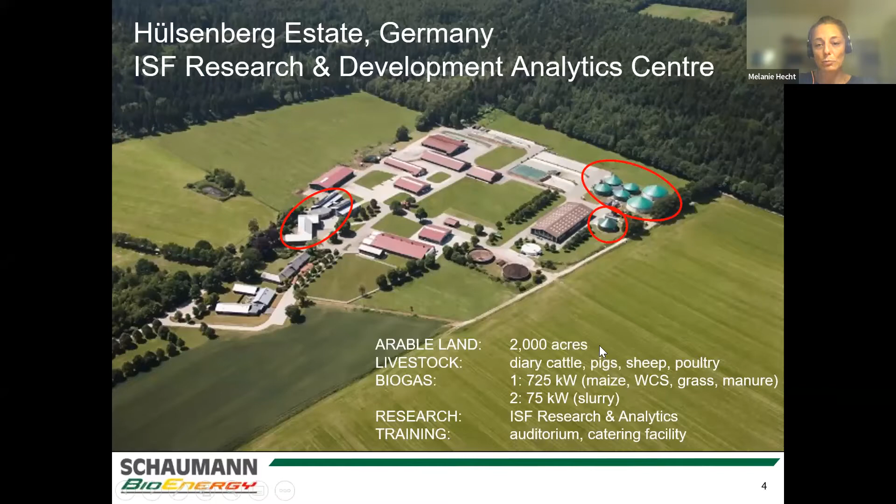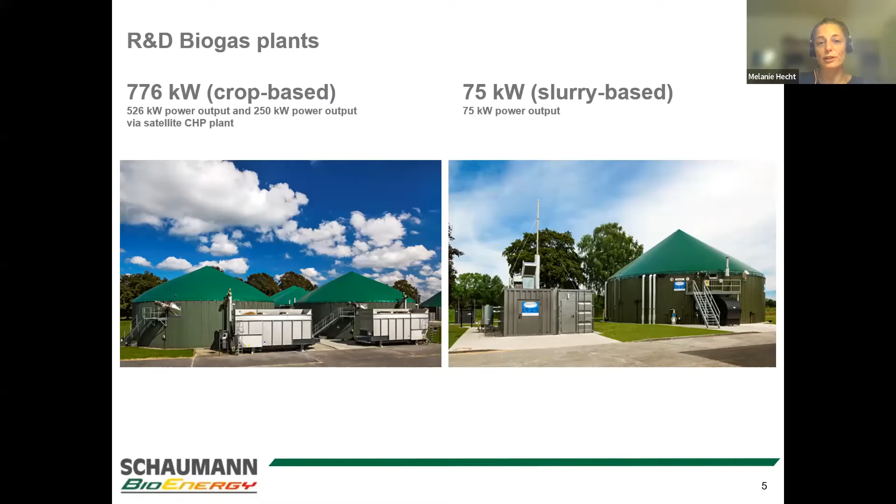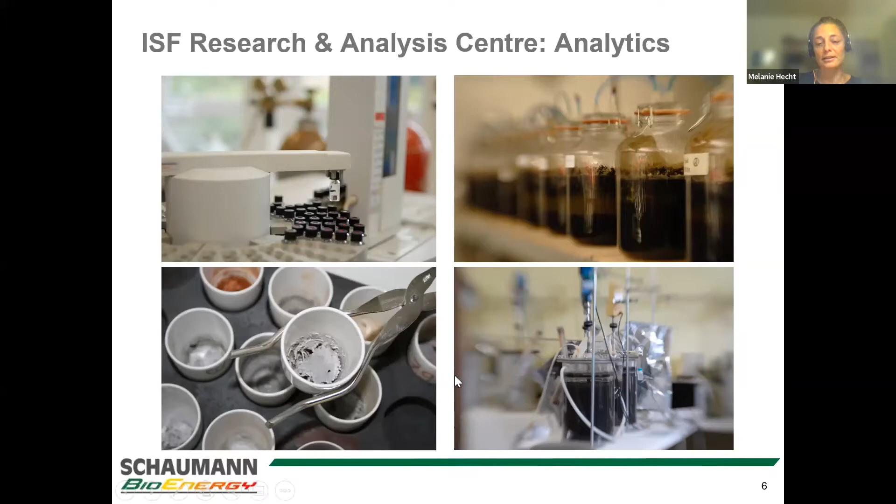We run a research estate in the north of Germany, where we also have 2 biogas sites, a larger one and a smaller one, that we use for research purposes. One is crop-based, one is slurry-based, and we test our own products in those biogas installations. We have a research laboratory. We do our own in-house research and product development, and also offer any biogas analytics that is necessary on a biogas installation, that ranges from volatile fatty acids to trace elements to biogas yields to any analysis that you need on a biogas site. Our approach is hands-on. That means we go on site. We consult worldwide, but that doesn't mean we're only on the phone or only via email, but we go on site.

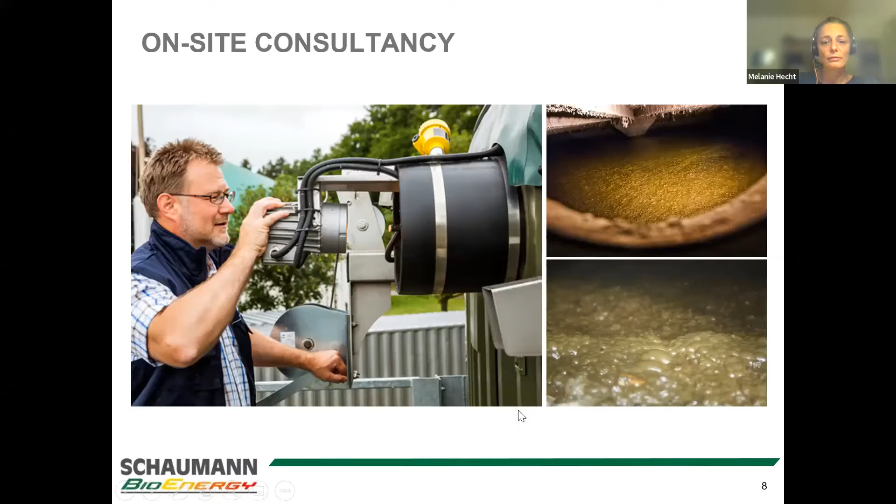We have partners and subsidiaries in countries, but we also go there ourselves. So as I said, I myself have been to Mexico. I have been to biogas plants with our partner, Victor. And that looks like that. We look into the digester if possible. We judge the surface. We look at, is there foam? What's the stirring like? What do the gas bubbles look like? What's the desulfurization, the sulfur deposits, and so on and so forth.

We look at feedstocks. We take samples. We discuss analysis with the operators, explain and interpret, troubleshoot and optimize. We look at feedstock compositions, what makes sense, what does not work together, what is a good feedstock, what's the gas yield going to be like. We are also forage conservation specialists, that is, we are ensiling specialists for grass, maize, whole crop, for any silages, and we consult on that as well.

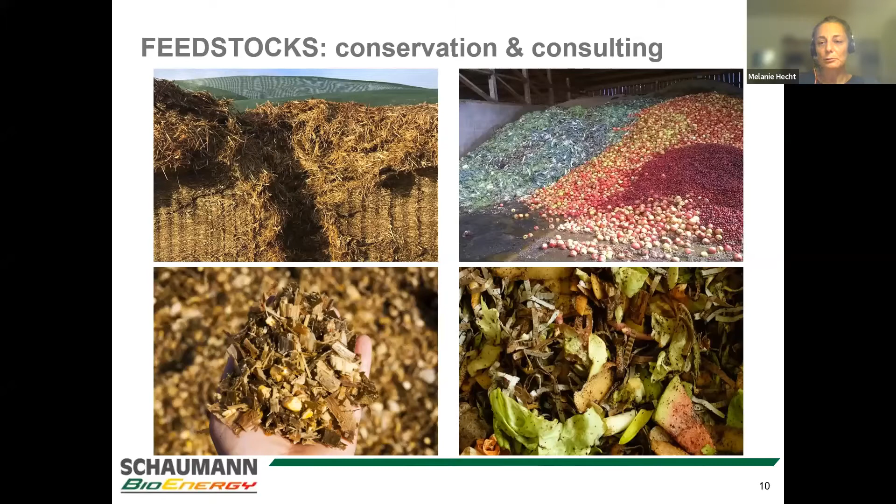In Europe, we offer gas leakage detection. That is, my colleague Carsten goes on site with an infrared camera and tries to detect gas leakages. That is methane. He can detect methane with his camera. I don't know if we offer that service in Mexico. I need to discuss that with my boss first. But it is a very, very valuable tool in our toolbox.

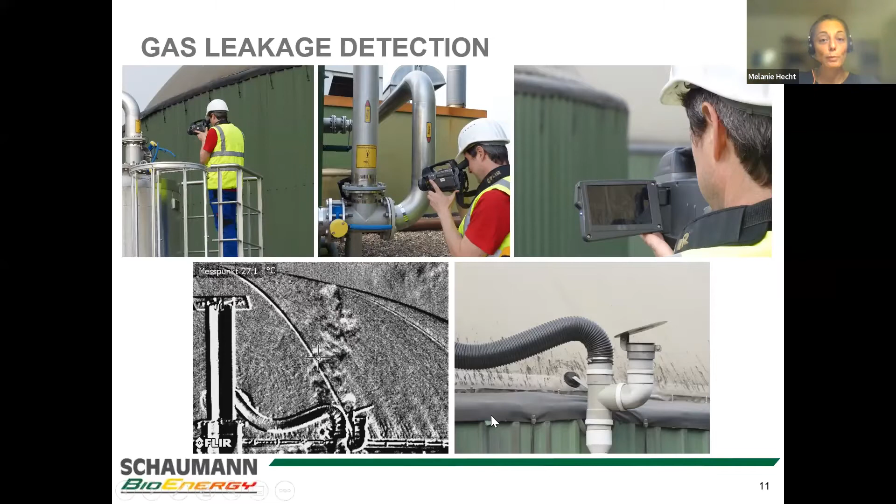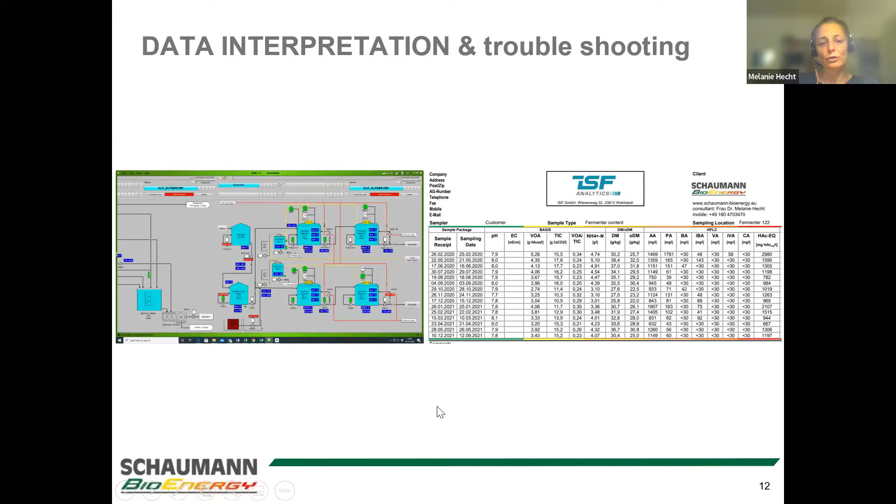We interpret data based on samples, that is analysis, but also site data. We look at the technical bits and bobs of plants, what stirrers, what are the stirring times, what sort of hopper is being used, anything that you can think of, temperature, obviously, feedstocks, everything that comes to mind. And we take all that into consideration and optimize when necessary, troubleshoot when necessary, find the problem and solve it, be it with feedstock changes, temperature changes, with product addition, anything that is necessary.

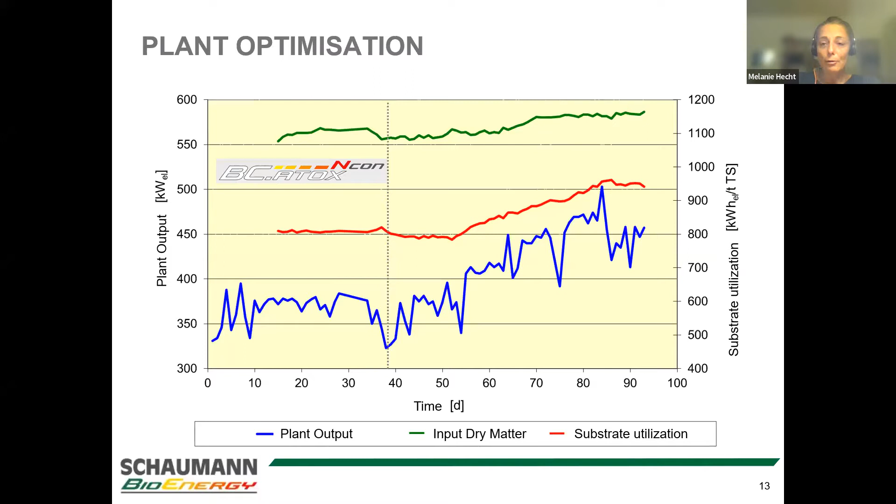Our boots on the ground would be our partner, Victor Basurto. He's got an MSc and PhD in animal nutrition and reproduction. He's got 45 years of experience on his back, 24 years at Cargill Purina alone. And he is a very, very experienced specialist in the field of animal nutrition. And he very quickly understood biogas, and he would be able to come on site, give first advice, maybe dial us in if necessary, take samples, send them to labs, and help with interpretation and troubleshooting.

And apart from being a fantastic host when I was over, and a brilliant animal nutritionist, he is a long distance sea swimmer, which I find really impressive.

Okay, that was us very quickly. So that is what we do in our team of over 60 biogas specialists worldwide. And that is a very, very extensive network I can tap into. There's hardly any feedstock we haven't seen, any problem we haven't encountered. So we are seeing and treating and consulting for over 3,000 biogas sites worldwide.

But that brings me to my agenda. Let me start here. Anaerobic digestion. I'll give a quick technical layout. I didn't know what audience to expect, so I'll show some pictures of biogas sites and explain very quickly how a biogas site works. That might be absolutely bananas for some, but it might be important information for others. I'll dip into the biological process. How does that work? What do the microbes in the digester do?

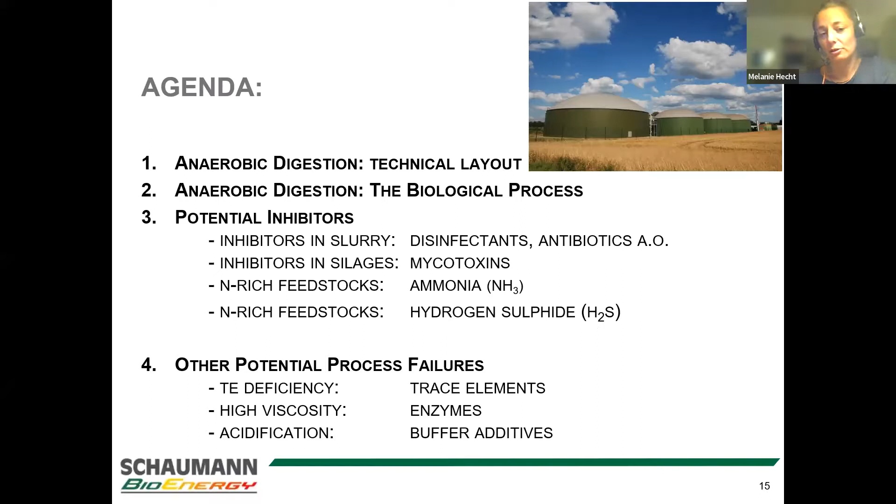But let's get started. So anaerobic digestion, technical bits and bobs. A biogas site basically looks like this, some sort of digester, that is the tank that is being fed, the most biologically active tank. In this case, it's 2 digesters. You can have any number of digesters from 1 upwards, sky's the limit. Then usually comes a post digester. Any residue from the 2 main digesters goes into the post digester and is further digested, and then into the storage tank from which it is extracted for spreading on the field.

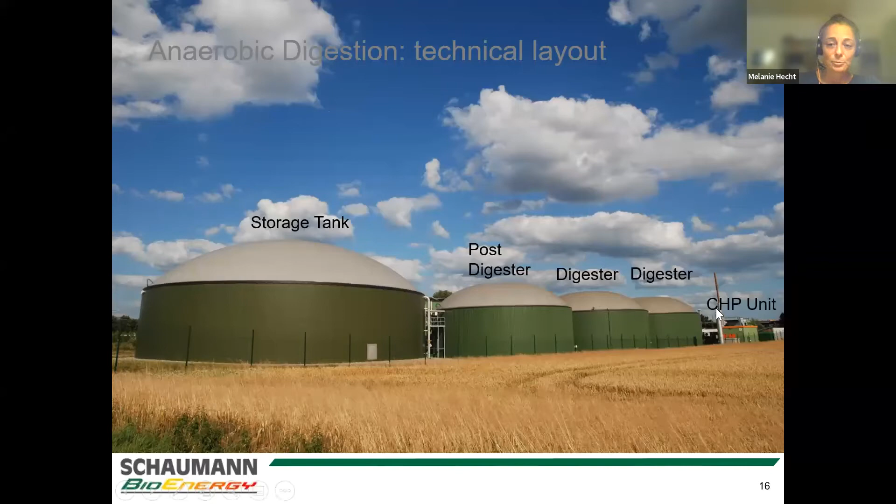The gas, the biogas, consists of plus minus 50-50 carbon dioxide and methane. That depends a bit on the feedstocks, but those are the 2 main components. And the methane is combustible. That is what we're after. We want to extract the energy that is in the methane, and you can either combust it in a CHP unit, that is an engine, or you can upgrade it to biomethane.

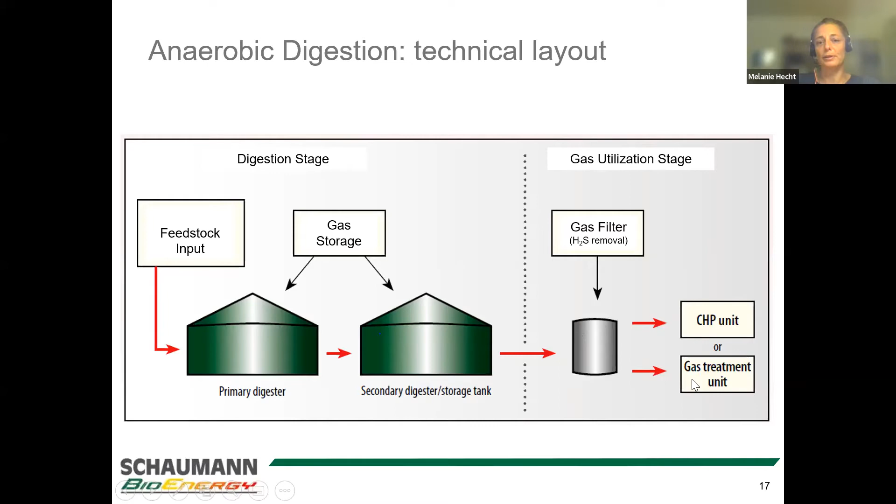You can upgrade it to biomethane and then insert it into the grid. This is a schematic: feedstock input into the primary, secondary digester, gas storage in the membrane roofs, gas filter, that is H2S removal, and then you either run the gas through a CHP unit or a gas treatment unit to produce biomethane. So that's one way of doing it.

A very different way of doing it is a slurry lagoon. It's basically a hole in the ground. You cover it with a foil, trap the gas, and also either combust it or upgrade it to biomethane quality. This is a very different way of doing it. It's no better, no worse. It's very simple, but it can pose all sorts of problems as well.

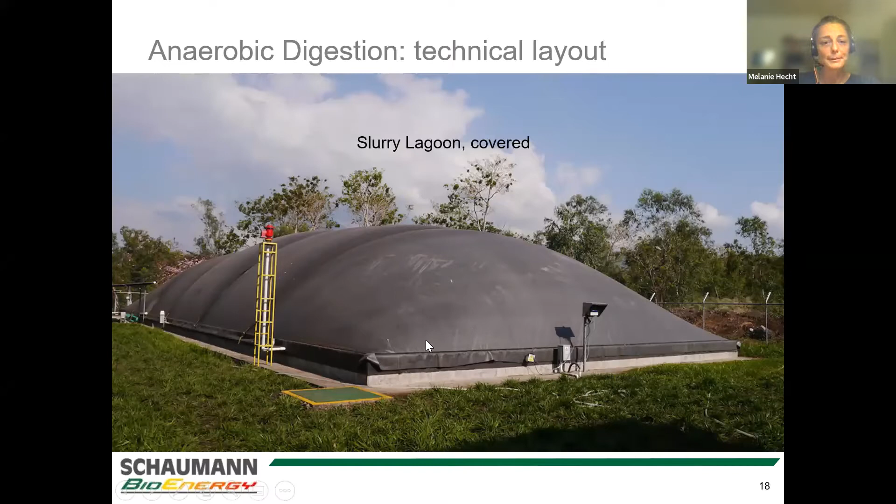Just to give you an idea of what a biogas site looks like. Might be trivial for some, but maybe not for everyone.

Now, the anaerobic digestion process happens in all tanks, but mainly in the digesters. It starts with very large molecules from the input feedstocks, be that silages, slurry, any sort of vegetable waste, food waste, rendering material waste, waste from breweries. Anything organic except wood can be broken down in a biogas plant. Wood cannot be digested in a biogas plant because the breakdown of lignin requires oxygen, and the anaerobic digestion process is oxygen free.

So you start off with those very large molecules like proteins, fats, and carbohydrates. They're broken down in the first stage, called hydrolysis, into their monomers, into their components, that is, amino acids for the proteins, sugars for the carbohydrates, and fatty acids.

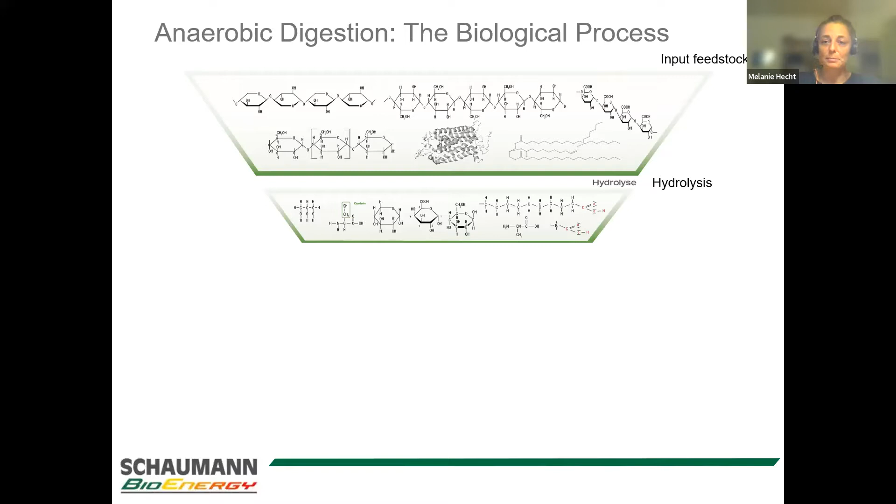It is then further degraded by other bacteria, acidogenic bacteria, during acidogenesis, and all sorts of volatile fatty acids are produced, such as butyric acid and propionic acid, which are then by other bacteria converted in acetogenesis into acetic acid. Acetic acid is a direct precursor of methane. Acetic acid can be converted into methane.

So this is 3 of 4 stages. Hydrolysis is the first step. Acidogenesis is the acid production stage. Acetogenesis is the acetic acid production stage. And then the last step is methanogenesis, when methane is produced and, as a byproduct, carbon dioxide.

I can see Victor now. Hi, Victor. Hey. Sorry for that.

So this is the anaerobic digestion process. It is run by hundreds of different species of bacteria, all in the same space and at the same time in the digester. There is no compartmentalization in a digester. There are biogas plants that run a separate hydrolysis tank, but that is not necessarily the case for all biogas sites. Normally, you have one tank and all those processes run alongside each other at the same time, and they can inhibit each other.

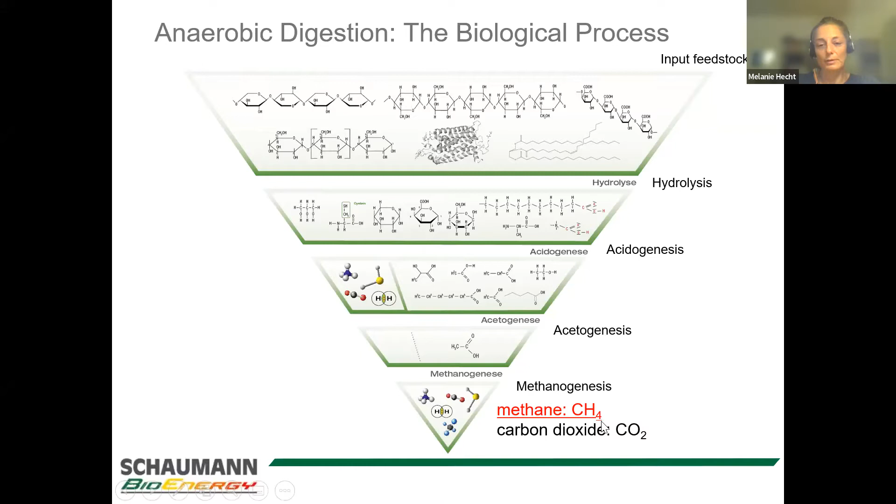If one stage is inhibited, then the following stages cannot run. It's a bit like a traffic jam: when lanes get blocked, cars can't pass. And it's the same here. The different stages metabolize each other's metabolites, and that is why it's very important that all stages run smoothly and that there is no inhibition in between. This is to illustrate that the process takes place in the digester, same place, same time, and all the different stages run at the same time.

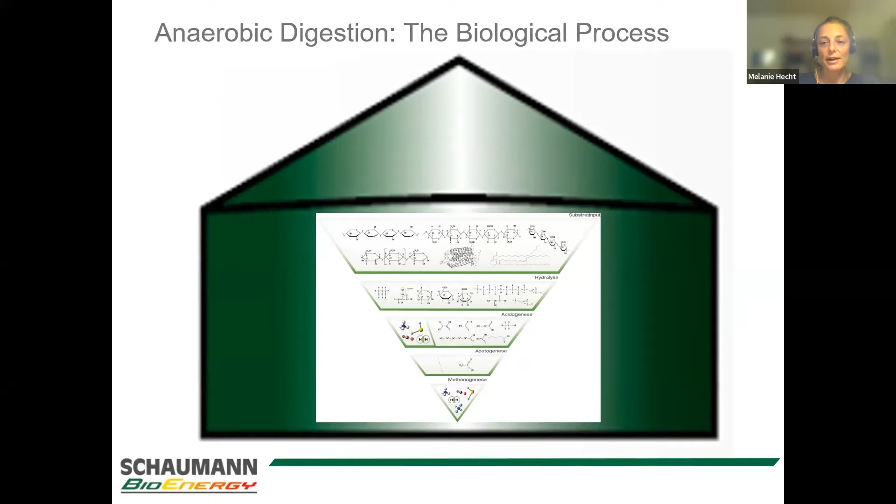Something that you need to take into consideration, especially when you commission a site, when you start a digester, or when there has been process failure, is microbial reproduction times. They vary greatly. Hydrolytic bacteria can be less than an hour, and some acetogenic bacteria take days, and that makes a huge difference.

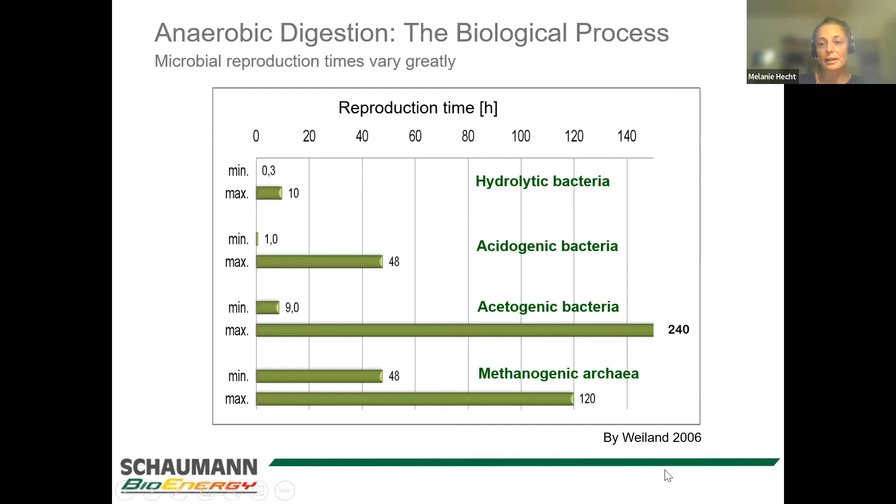When you start a biogas digester, you need to give it time for all the bacteria to establish, for all the species to establish, and for all the 4 stages to establish. This is to illustrate this. So reproduction times of bacteria vary greatly, and that is very important to take into consideration after problems in the digester.

But the idea is you have a large number of species, and it's like a chair with many legs that you sit on. If one leg of the chair breaks, never mind, it's still stable. You're still sitting at a table, you can eat your dinner, even if you lose one leg.

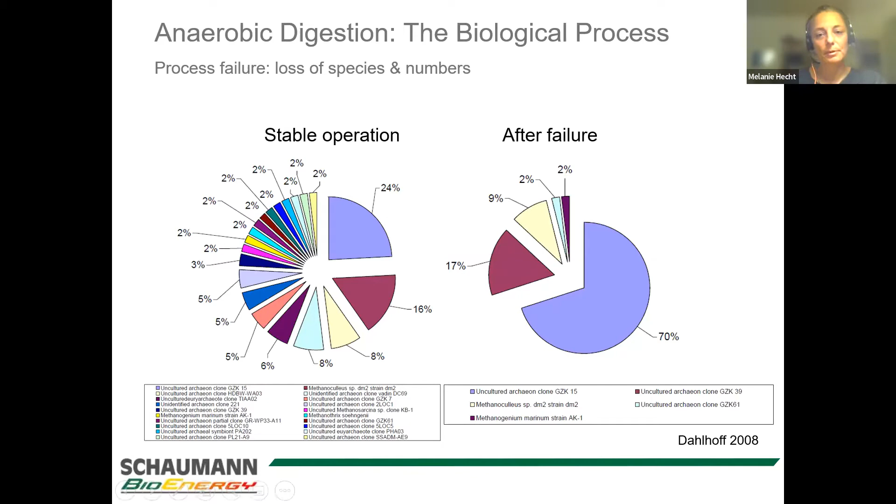Idea, you inoculate. You inoculate again with active material to replenish the lost bacterial species, and you need to give it time. Microbial reproduction times. You need to give it time and trace elements, but we'll come to that in a minute.

A very important environmental parameter for the bacteria is temperature in the digester. Another one is pH. I'm not going to go into detail on that one, but temperature is very important as well. There are 3 distinct temperature ranges we distinguish between: thermophilic, mesophilic, and psychrophilic. You see the temperature ranges below 25, between, let's say, 32, 35 to 45. It's a flexible range, but it gives you an idea what mesophilic means. And thermophilic is the warmest you can run a digester at. 60 is pretty ambitious. I'd actually say no higher than 55. Otherwise, your bacteria will at some point degrade. These are the 3 main temperature ranges.

And in Europe, Canada as well, in the USA, the most abundant temperature range we find is the mesophilic range, because it offers the most stable biocenosis, the most stable mixture of microbial species. It's a very high number of microbial species, and it's very stable. That means it's not so sensitive to changes. If the temperature varies by a degree or 2 or 3 or 5, it doesn't make that much of a difference to mesophilic bacteria. Thermophilic bacteria are very sensitive to temperature changes. The range of species is smaller, and that makes it less stable. It's a very sensitive biocenosis, and that is why a lot of operators opt to go for mesophilic.

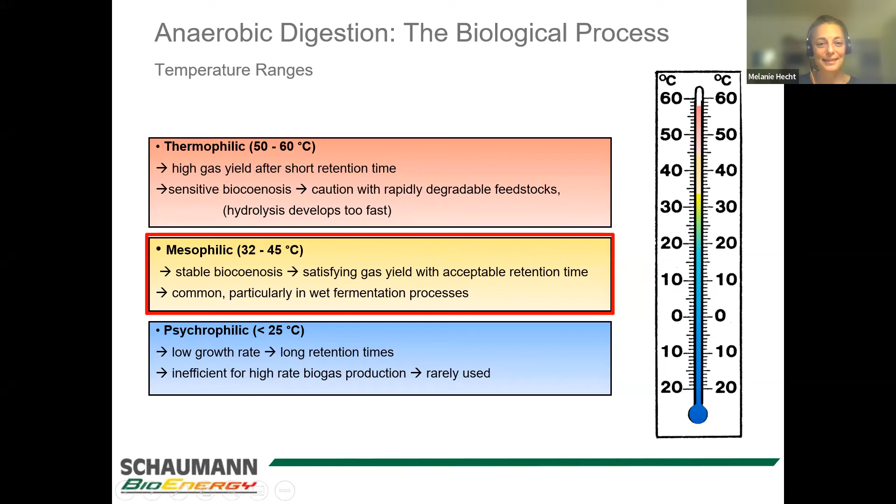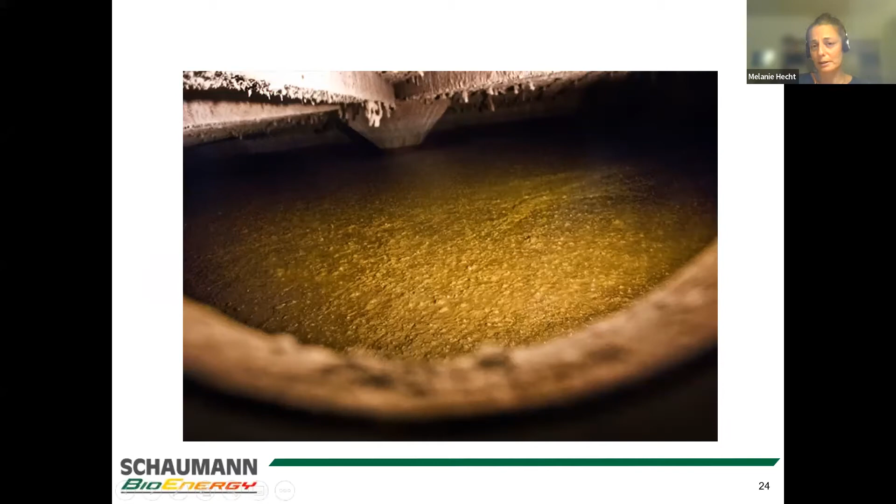Okay, the view into the digester, I mean, it tells you something. You see the gas bubbles, and you see if there's foaming, and you see if there's scum on top, and so on. But what you really want to know is, how's my process? How is it doing? Is it okay? Is it stable? Is there a problem? Can I feed more? Do I need to feed less? Has that new feedstock that I recently introduced had an impact? And that is why we run analysis on samples.

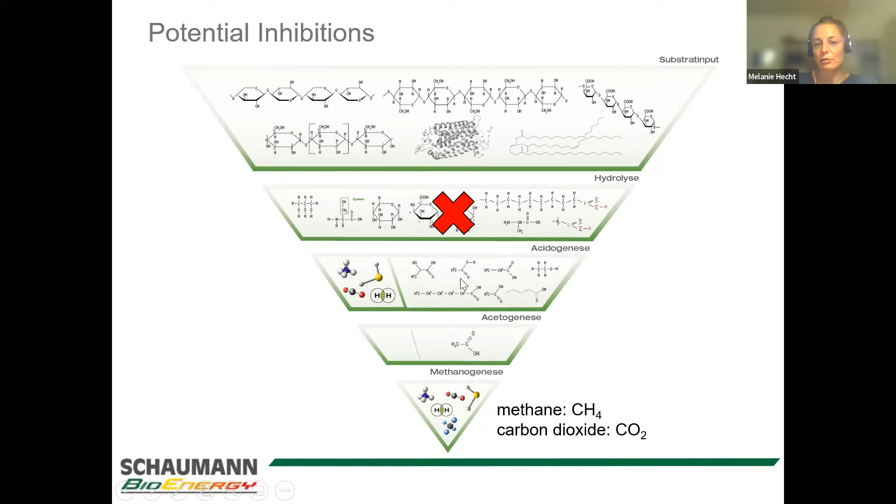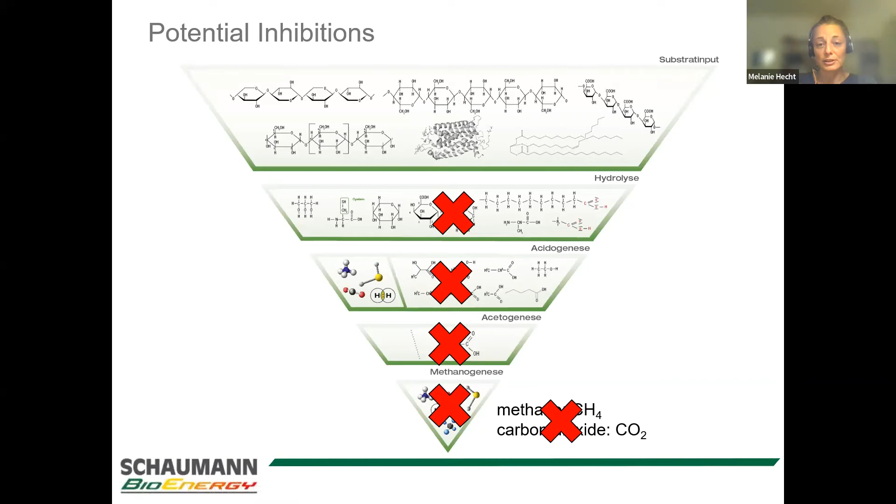Okay, potential problems. As I said, the process can be inhibited. That is what I said earlier. And if only one stage is inhibited, all stages afterwards are inhibited as well, which will then lead to no gas production, which will lead to downtime in your biogas site. The engine won't be running. If one stage is inhibited, then any stage downward of that is inhibited as well. And that's what we're going to look at now.

Are you yourself the farmer? Then you can easily have a handle on this. But if you're buying the slurry or the manure, have an eye out, talk to the farmer. What foot baths are they using? What disinfectants are they using? Formaldehyde has a terrible effect in the digester. It can bring it to a total standstill, and more often than not, it cannot be restarted. So formaldehyde is a very dangerous inhibitor.

Also, antibiotics are very potent in some cases, and they degrade after a while, and you can dilute them, but they cause huge process problems if they are entered into the digester in larger concentrations. And with larger, I mean not very large concentrations. If you have a large livestock number, and you treat them with antibiotics, then this can cause massive problems in the digester.

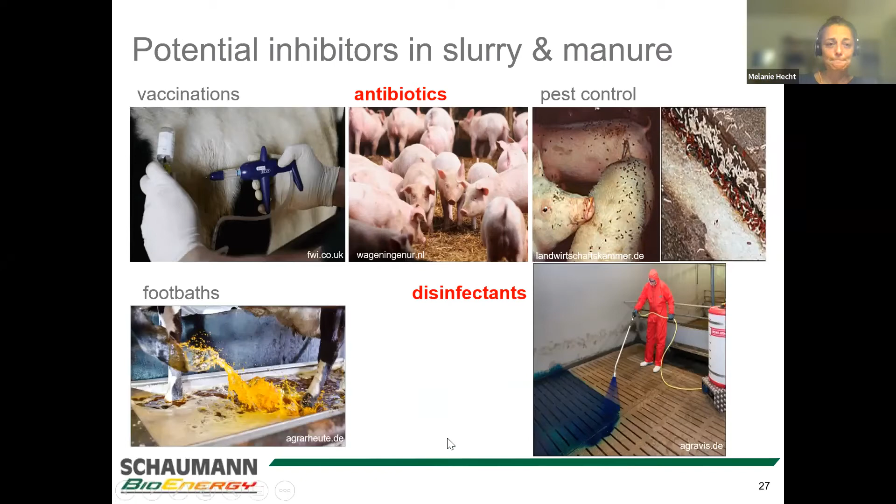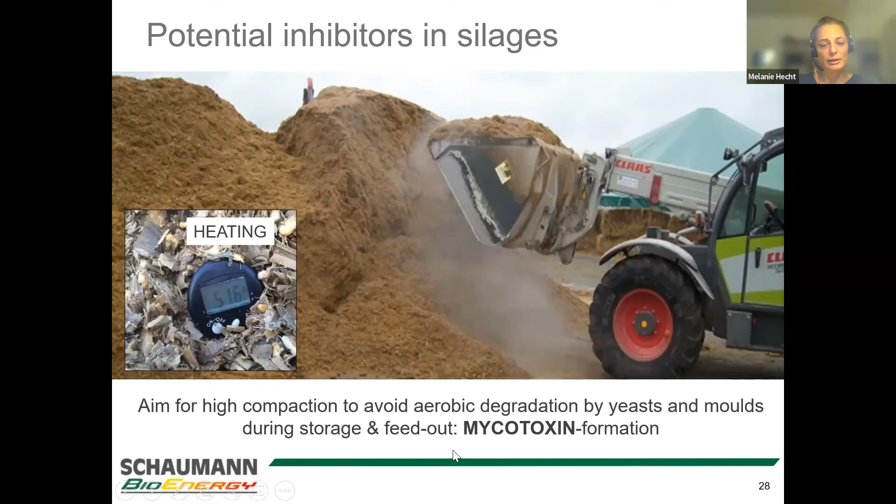Ammonia inhibition is another very widespread inhibition. We have that very often. Risk feedstocks include anything that is protein rich, be it grass, cereals, or nitrogen rich, such as poultry manure and litter, rendering facility material, cheese, stillage, anything that is nitrogen rich.

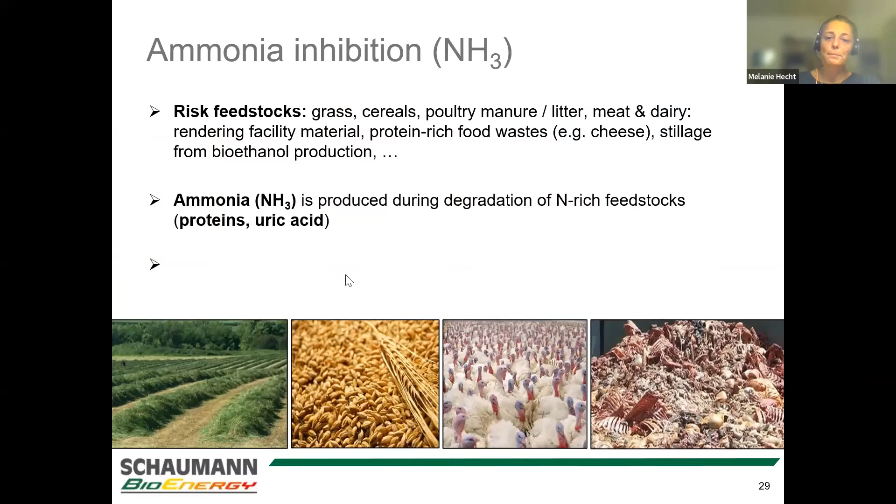And the problem is that ammonium is converted into ammonia with increasing pH and with increasing temperature. Another reason why a lot of sites run at mesophilic temperatures. And this is the problem in many sites. They have high ammonium contents, they have a high pH. This is turned into ammonia, and if they run at too high temperatures, then they run into ammonia inhibition.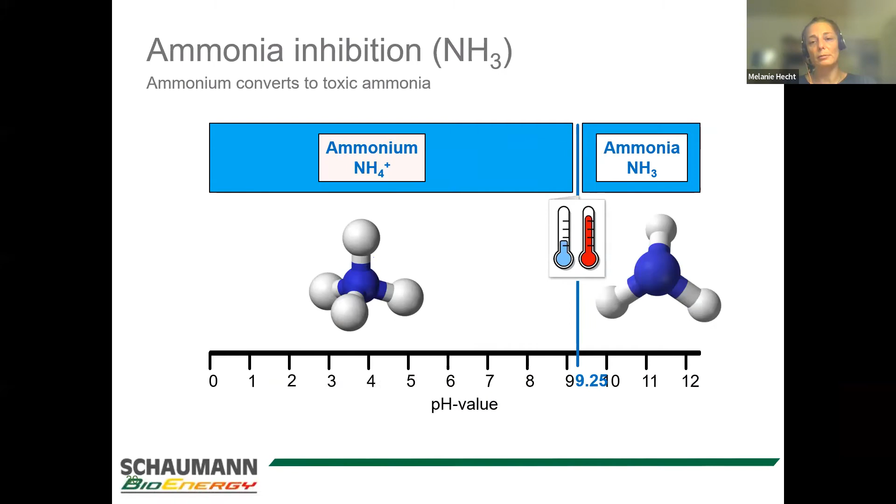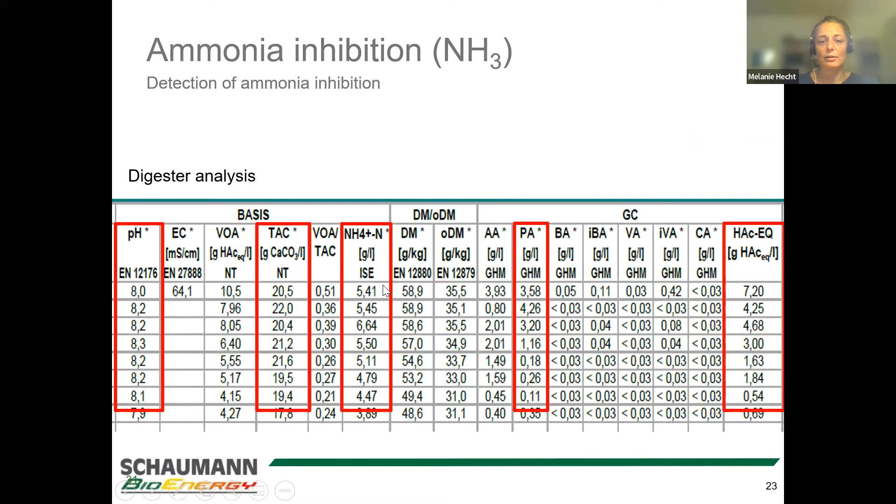Classic example, and you can detect that with high ammonium concentrations and high propionic acid concentrations. Here in grams, 3.6 grams and 4.3 grams is a lot. That is a very high concentration of propionic acid. It's a clear indicator for nitrogen, for ammonia toxicity.

You can get a handle on this by diluting the material, by not feeding the nitrogen-rich feedstock or less of it. But very often that's not possible because you have the feedstock and you want to feed it. Maybe you have paid for it. So that is very often not an option.

You could decrease the temperature, but if you're running at 40 degrees anyway, there's no way to go any further down. Then the process is very slow. And if you're running at a very high efficiency, you need the temperature to process the feedstocks you're feeding.

So then what you're left with as an option is binder. There are ammonium binders available, and they bind ammonium selectively. So you can reduce the ammonia inhibition. You remove ammonium from the equation, ammonia is not generated, and so the ammonia toxicity is remedied.

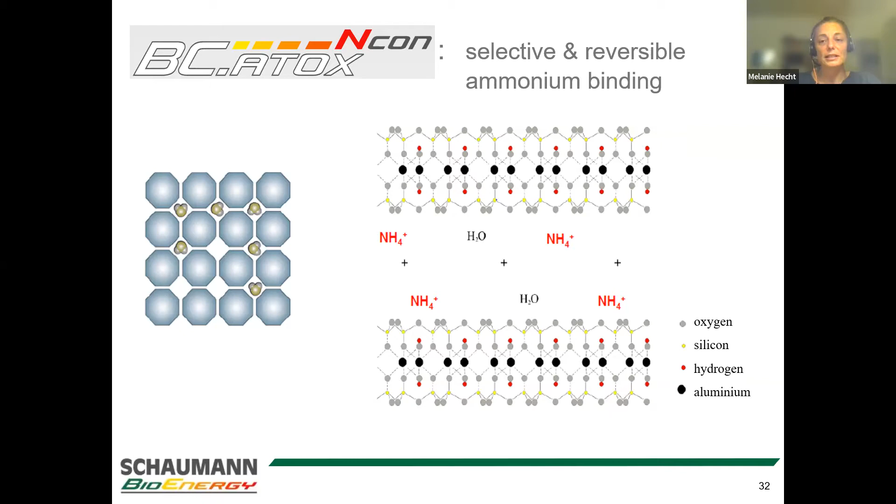Another problem with nitrogen-rich feedstocks is hydrogen sulfide. That is toxic to bacteria and also to humans, by the way. It precipitates trace elements. So that's basically like stealing our vitamins from our diet. You eat fruit and vegetables and you're a good boy and girl and you eat your greens, but if something were to steal your vitamins from your diet, then you could eat as much spinach as you like, it wouldn't do you any good. And this is what hydrogen sulfide does.

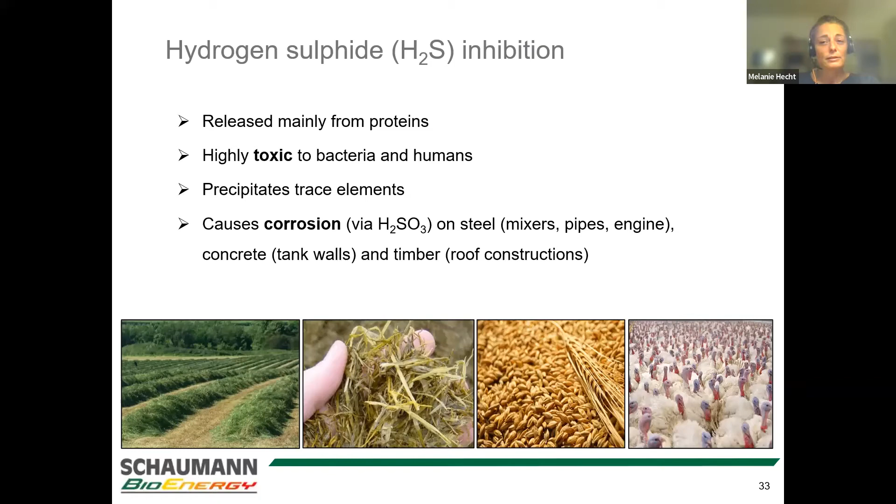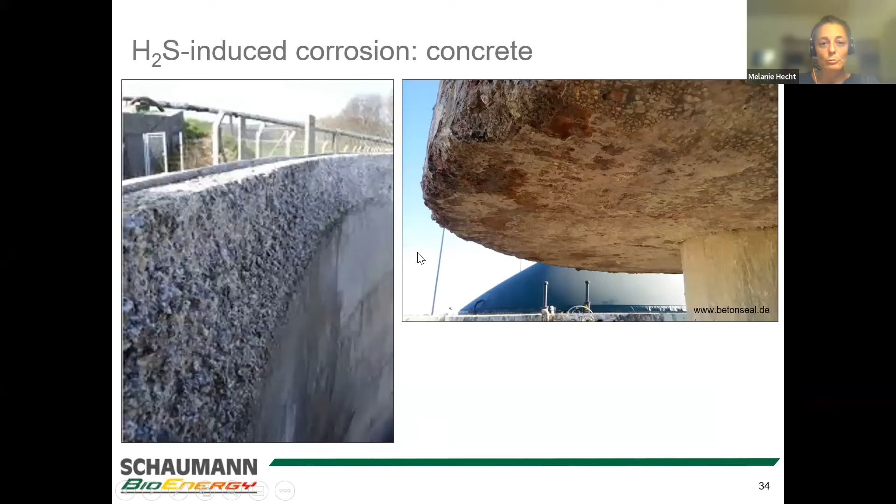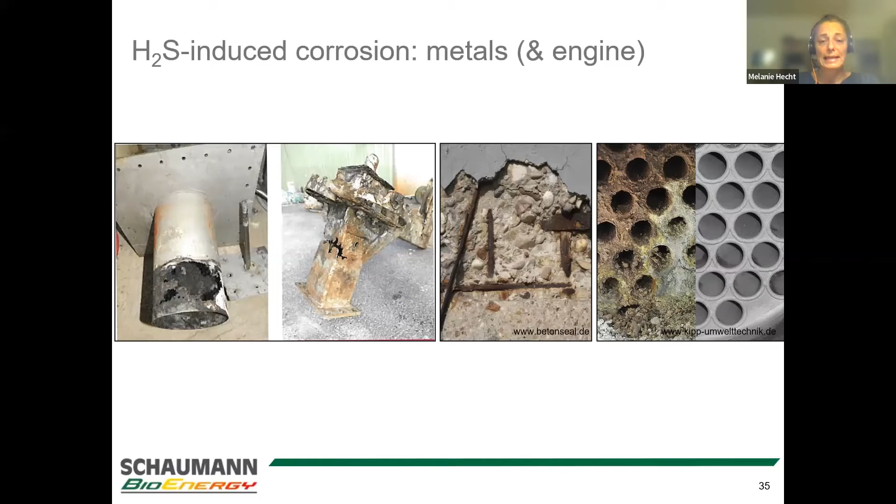It precipitates trace elements. Also, and this is very different and has nothing to do with digester biology, it will corrode anything that comes into its path. It will corrode concrete, it will corrode any metal, and also the engine, and it will also corrode timber constructions. And that is why H2S needs to be removed from the gas and optimally also from the liquid in the digester.

And that is why we recommend a cascading concept of desulfurization for biological reasons and also for technical reasons. You start with iron hydroxide in the digester. So you remove part of the H2S from the liquid itself. You avoid trace element precipitation. You avoid inhibition of the bacteria. As a second step, you can dose air or oxygen into the headspace. This will lead to sulfur bacteria colonizing the headspace surfaces and extracting the H2S from the gas.

And as a third step, you can use an external filter based on activated carbon or iron products to remove the last traces of H2S before the gas enters the CHP or gas treatment units. Gas treatment units require 0 ppm H2S. They cannot tolerate any H2S, whereas CHPs are recommended to be run at 0 ppm, but they can tolerate a bit of it.

The H2S will also acidify the engine oil, so you have shorter operational times for the engine oil, which again causes costs. Engine oil costs money, so the less often you need to change it, the better. So desulfurization is a crucial step in optimizing your site biologically as well as technically.

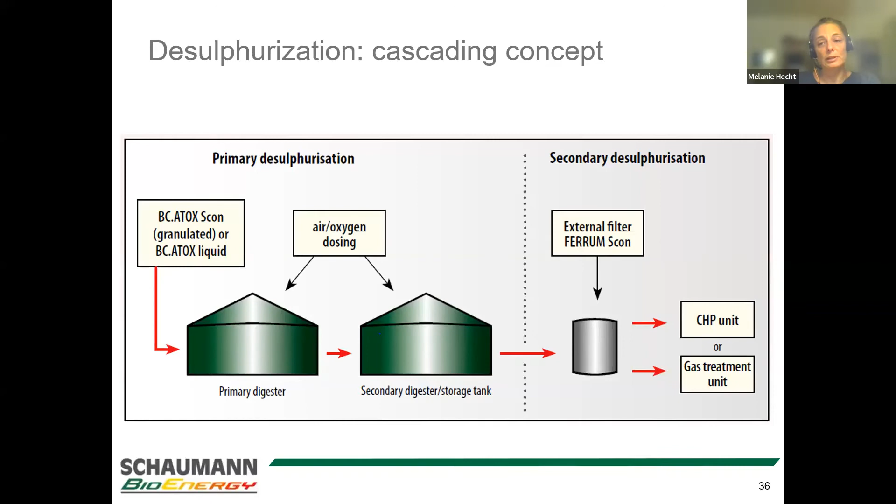Okay, to sum up inhibition countermeasures as such. Best way to get rid of an inhibition would be to identify the toxic substance in the feedstock. More often than not, that is actually pretty tricky, because usually a biogas plant's diet consists of a whole range of feedstocks, up to 10, 15 different ones, changing ones at varying tonnages, at varying qualities. So the identification of a toxic substance is actually difficult.

If you were to think this is my culprit, this is my toxic substance, you could decrease it. You could feed less of it, if that is possible. If it's, for example, an antibiotic contaminated slurry, you need to remove it from the diet as long as it is contaminated. You cannot feed that any longer, as well as formaldehyde contaminated slurry or manure. That is something that you need to remove at once.

What you can then do is you can dilute the digester, the inhibited digester content. You can add water, slurry, watery feedstock like fizzy drinks, for example, beer that has gone off, or milk that cannot go to human consumption. Yeah, so something like that. You can use that for dilution.

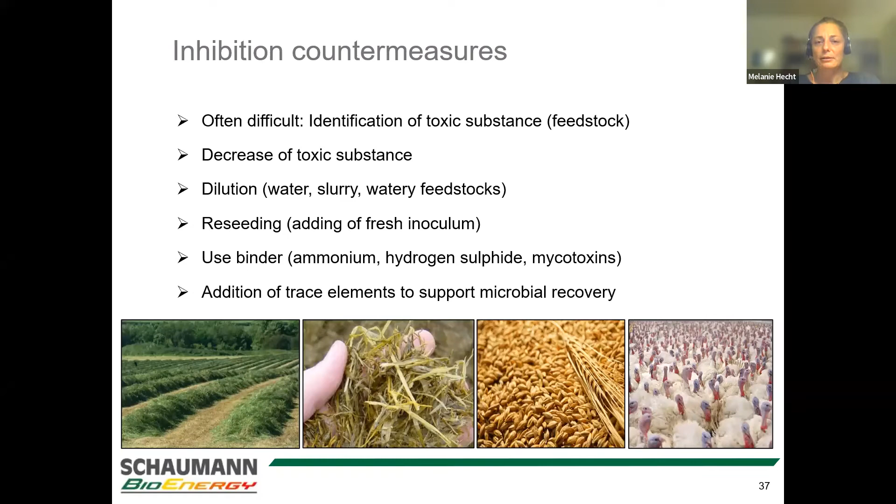And also, we'll come to that in a minute, addition of trace elements to support microbial recovery. You remember the two disc diagrams I showed you. So after an inhibition, you'll have lost species and bacterial numbers, and you need to replenish them by reseeding and by giving the digester time and trace elements, because the bacteria have very particular demands for trace elements. We'll come to that. Yeah, that's the next topic, I think.

This is just to give you an overview of potential process failures. There is a whole range, just like illnesses for humans or for animals. There are a lot of tricky bits in a digester as well. Digesters can acidify due to overfeeding, due to inhibition or temperature changes, or to trace element deficiency. Low gas yields can be caused by leakages, by inhibition, again, inadequate mixing, which brings us later to viscosity problems. Mechanical problems can lead to foaming, to floating layers or sedimentation. So all sorts of issues can happen in a biogas site.

And it is definitely advisable to have a consultant, to have somebody you can turn to who will supply you with the knowledge, with the expertise, and with the products that you need in the case of those failures.

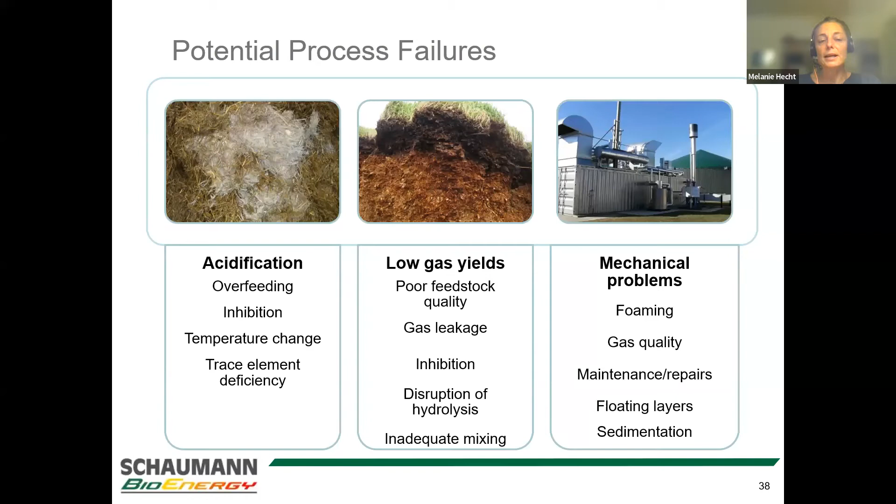There we are. So, which brings us to one of the main problems in biogas sites. Apart from ammonia inhibition, that is a big one, trace element deficiency is another one. Ammonia inhibition is not so easily remedied. It takes a while, takes binder, takes tackling the problem. Trace element deficiency, on the other hand, is an easy one.

All bacteria require trace elements, and if you run your biogas plant at a very high efficiency, like an Olympic sprinter, you know, if you're Usain Bolt, you don't eat spaghetti carbonara for dinner. You have special food, you get vitamin supplements, you get mineral supplements, you get all sorts of special food and special treatment. And this is exactly what your digester needs if you want to run it at high efficiency.

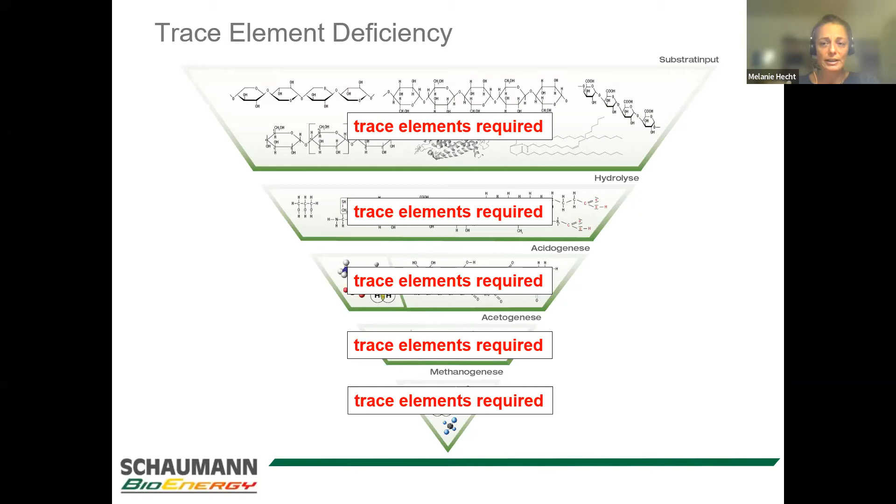Trace elements: the law of the minimum is probably something everyone's encountered at one or other point in their education. It's basically good old Liebig's barrel. If one element is missing, this will limit the production of crops and of animals and also of biogas. And in the case of biogas production, anaerobic bacteria need special trace elements. They're not like the classic ones that we like or animals like. Bacteria need different ones, especially the very old archaic methanogens.

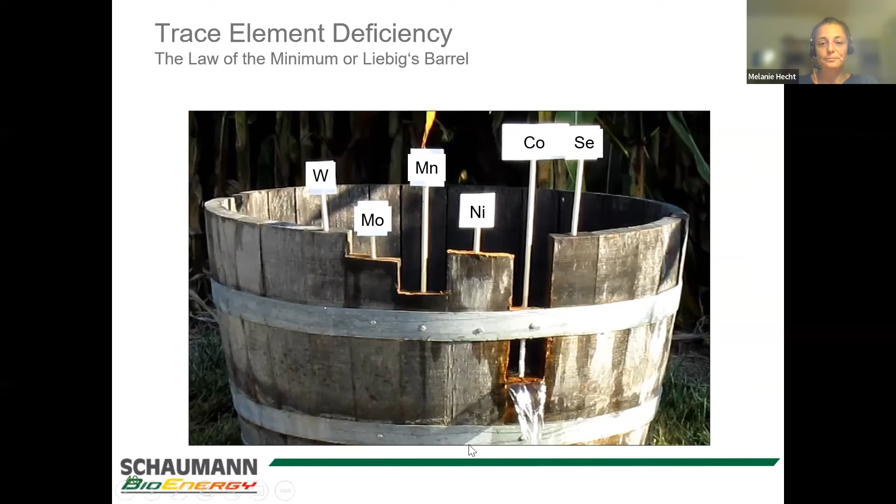They're very old, and they basically grew in an environment where other trace elements were widely available, such as tungsten, molybdenum, nickel, cobalt, and selenium. That's what we call the big five. These are super essential trace elements, and in very few digesters do they not need to be replaced. So almost all digesters need trace element supplements to run at high efficiency, and they need the big five and a few more like manganese, zinc, copper, and a couple of others. Also iron.

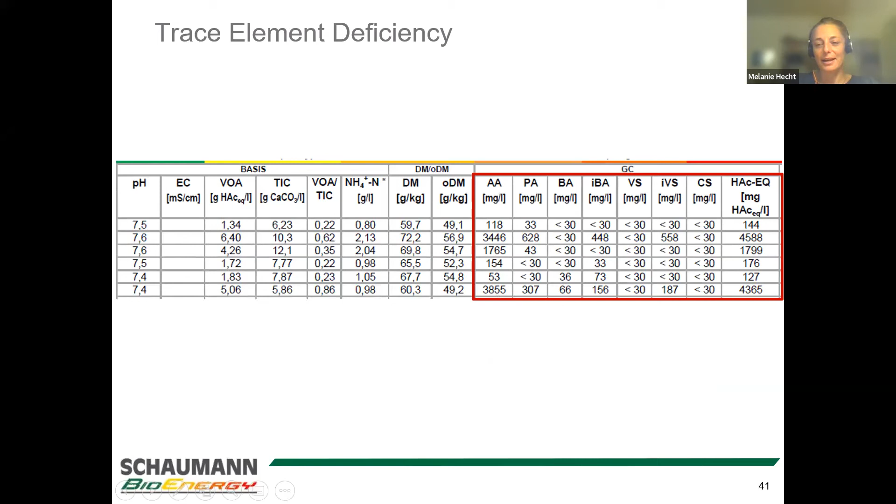Sorry, I need to go back. The acids go down. So this is after treatment, and then the operator stops using trace elements and the acids go up again. It's a classic. Trace elements are used, acids go down, trace elements are then dropped off the diet and acids increase again.

Okay, so this is the way we operate. We measure and formulate according to analysis. We also have standard mixtures. We know a crop-based, slurry-based site has probably this demand for trace elements, and we have standard mixes that are custom made for these situations. But we prefer to go bespoke.

So this is basically, with ammonia inhibition and trace element deficiency, you have the two major inhibition or process failure reasons that most often occur in biogas sites. Other inhibitors are rarer, but they occur. And H2S, hydrogen sulfide, can also be a problem.

Now we're moving a bit away from inhibition and process failure as such, and into high viscosity issues. Viscosity is basically the mixability of a substrate. How well and how easy can I stir it with the stirrers I have? Most likely high viscosity is due to high fiber loads. That is grass silage, manure, one of my favorite feedstocks, but yes, it comes with straw. Also when straw is being fed, when whole crop hasn't been chopped short enough, there are all sorts of fibrous feedstocks that can lead to high viscosity.

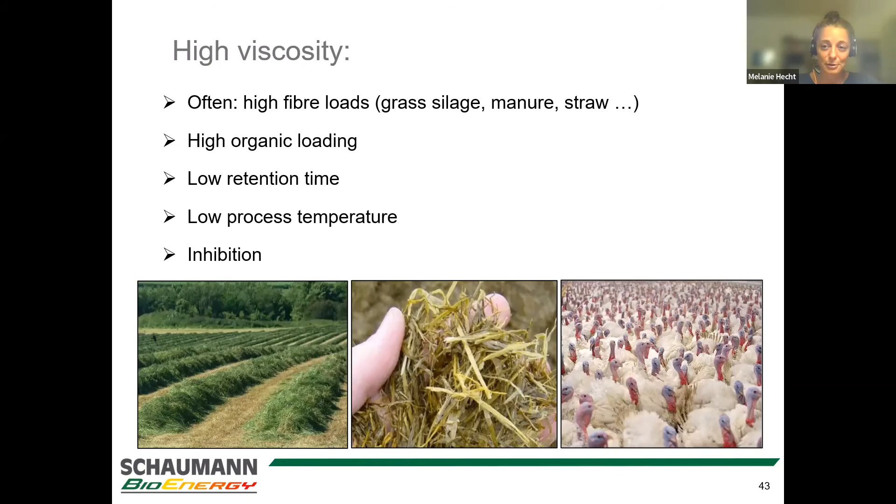If that is coupled with high organic loading, that is high feedstock input into the digester, and low retention times, that is low time in the digester, and low process temperature, that can lead to viscosity issues because the enzymes the bacteria produce are not working fast enough. Enzymes are always temperature dependent, and the higher the temperature, the better they work. And the more time the bacteria have, the more efficiently they will break down fibrous feedstocks. And if time is insufficient, and maybe temperature is insufficient, or maybe there is an inhibition, then you end up with high viscosity. And that can look like that.

The more zones you have in a three-dimensional digester, imagine it three-dimensional, that are not stirred, that are not mixed, so feedstock is not transported to the bacteria. The bacteria can't move themselves, so they need to be brought to the feedstocks. And also what happens in those dead zones is that bacteria break down feedstock, acids are produced, and the pH drops locally. So you have acid nests, we call them, in digesters.

And if those acid nests are mixed at some point, they will cause buffering. And when the buffer in the digester, it's a hydrogen carbonate buffer, when that buffers, the hydrogen carbonate is turned into CO2. That is a very rapid reaction, within seconds, and rapid gas production, be it CO2 or biogas, can cause foaming.

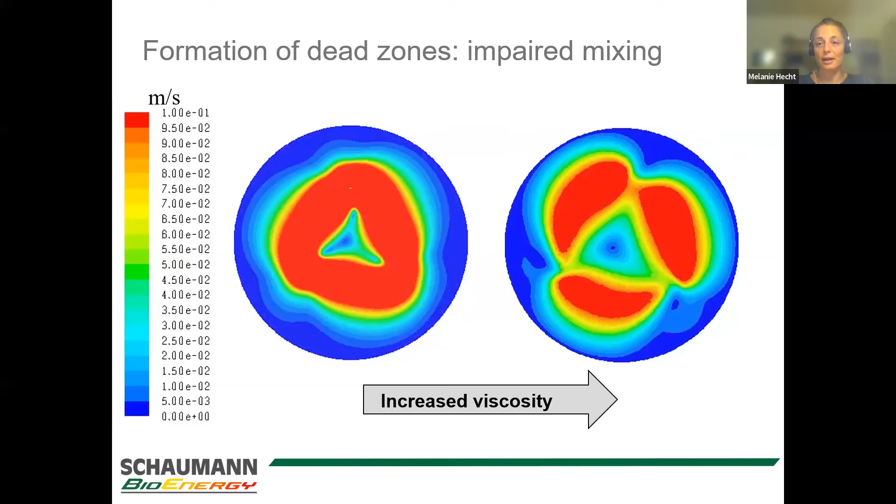So formation of dead zones is not only a problem in substrate utilization. The feedstocks aren't broken down, they're not degraded, so gas is not produced from them, but they can also cause foaming. They can cause mechanical problems, because if feedstock isn't properly distributed in a digester, if it accumulates, for example, in some spot and is then transported to a stirrer, the stirrer might actually be damaged by that high amount of feedstock. So formation of dead zones is very undesirable.

It can be broken down by enzymes, by enzyme products, to a certain degree, but there are limits to what enzyme products can achieve. So this is something that you want to avoid at all costs because it costs a lot. Operational downtime, opening of a tank, it's messy, it's dangerous, the external stirrer costs a lot of money, and then you're not even sure the floating layer won't reform when you've closed the lid again. So floating layers are the worst case. Try to avoid them at all costs.

So enzymes, for everyone who's been to a biology class, you probably know that enzymes work like scissors. They can cut molecules into little pieces. And in this instance, fiber is mostly composed of cellulose. That's the main component of cell walls, and it is very difficult to reach for enzymes. And it's also very difficult to cleave, to snip into parts. And that's what enzymes do.

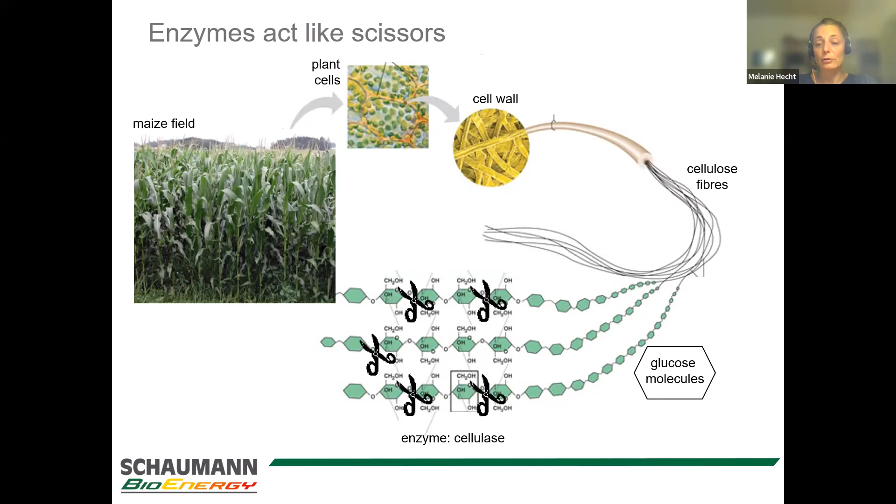We sell enzyme products that are customized for various feedstocks. For example, we have one enzyme product that is specialized on grass, one that is specialized on straw, and that will very effectively cleave those fibrous components and leave them very pliable and soft, easy to stir, and obviously they also yield the gas. And those enzymes are hydrolytic enzymes. So we basically add more of what is already there.

It's a bit like, I don't like the word doping really, but it's a bit like doping. We dope the digester and it runs at a higher efficiency. It becomes more efficient at breaking down fiber. And then it avoids those dead zones, foaming and damages and floating layers and all the rest of it. That's what enzymes can do.

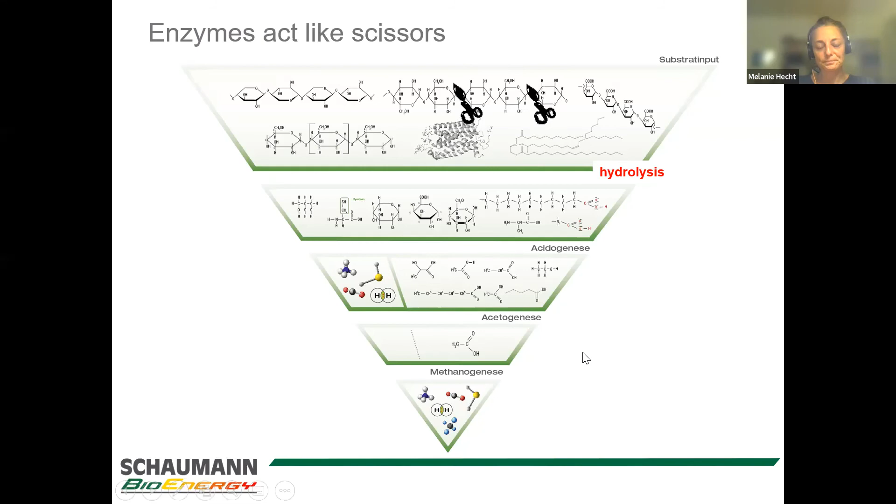Last but not least, I have 5 minutes left. I keep looking at my watch.

Last but not least, I showed you earlier the analysis. I showed you increasing acids that are produced during those 4 stages. And depending on which acid, you can tell what the problem is. Propionic acid points to ammonia inhibition. Iso acids point to trace element deficiency. But there is a point when the acids become too much for a digester, and that is called acidification.

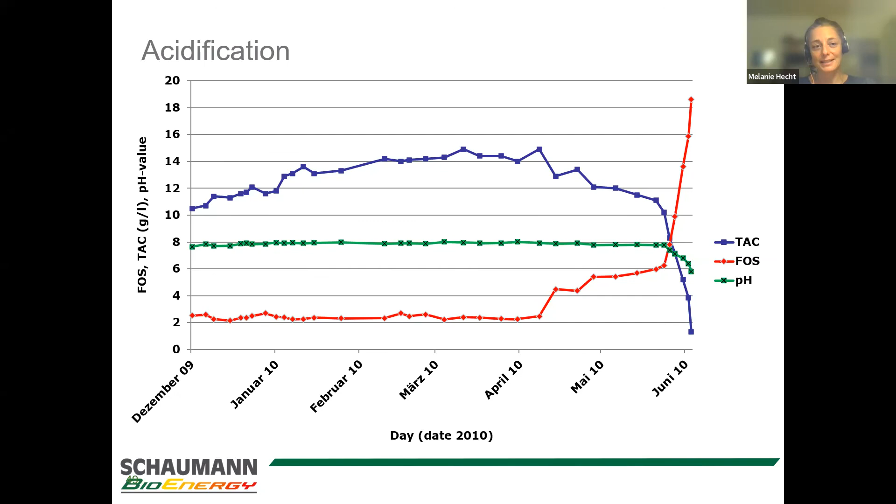Some bacteria, especially the methanogens, don't like that at all, whereas acidogenic and acetogenic bacteria like it. So they keep on producing, and the pH keeps on dropping, and the methanogens keep on striking. That is acidification. That is what it looks like. Sodium bicarbonate is one major remedy for acidification. If you add that, you add buffering capacity, you stabilize the pH.